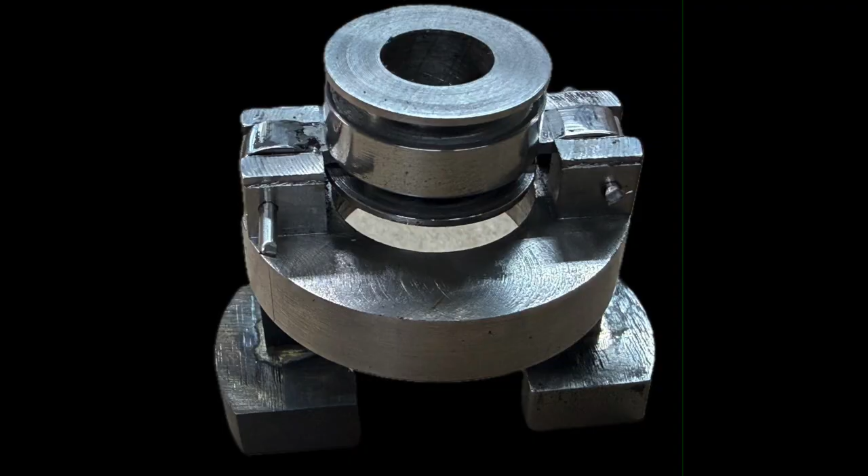Video number 23 on the odds and ends hit and miss engine. Last week we showed you how to make a few parts. One of them was these, and these are the arms that the weights for the governor go on. This one is finished now. This is for the other engine, and I'll show you how I made those weights first and attached them.

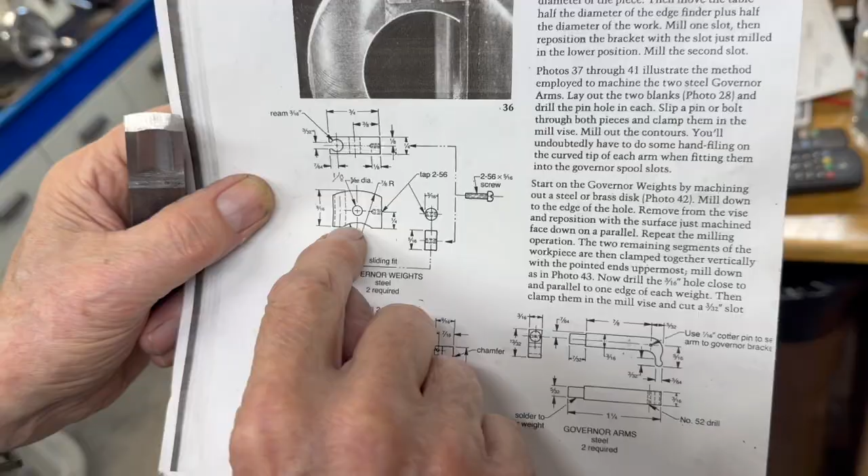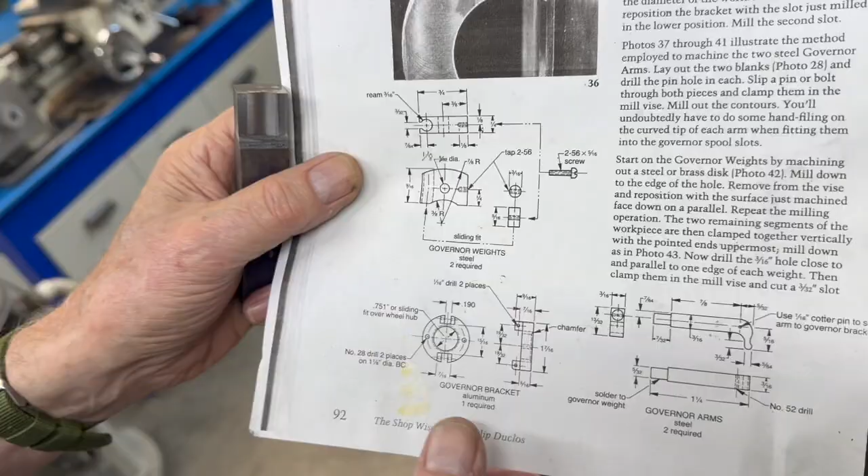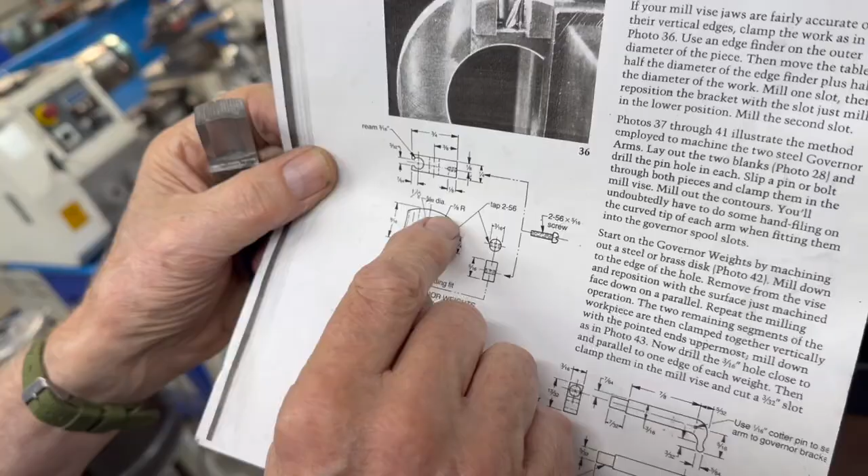So it's showing you this part here with two radiuses. This radius has to match the flywheel. The outer radius doesn't have to match anything. It's just there for looks, and it should be somewhere near the curvature of the flywheel. It's saying 7/8 of an inch, but this is only actually a little over 3/4 of an inch radius, because that's as far out as I can get my four-jaw to do that, and I'll show you how I did it. But this radius is not that important. It could actually be straight across, it wouldn't matter. But this radius has to fit against the flywheel, so you want to try to keep that in pretty close.

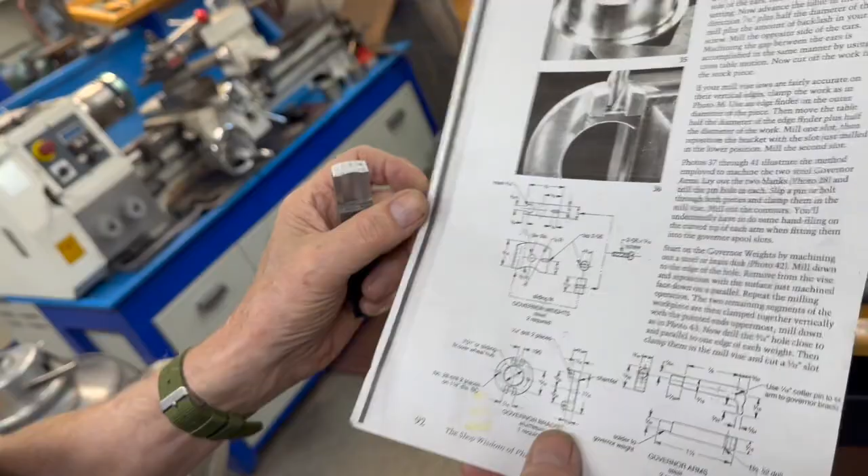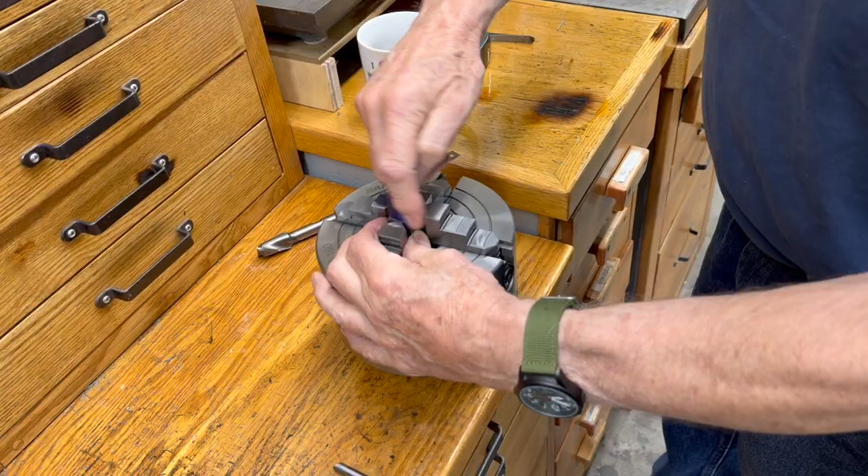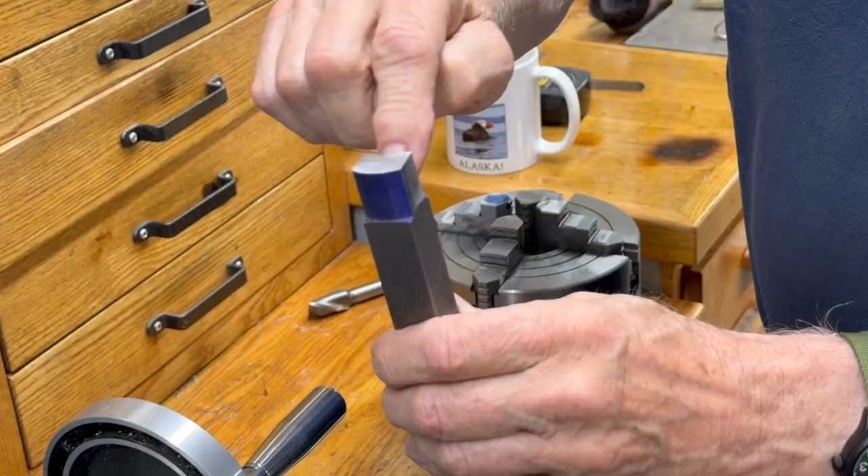So I'll show you how I made this part. It's a piece of 3/4 inch square, 12L14. What I did is I put it in the four-jaw and moved it out as far as I possibly could. Now this is a 6-inch four-jaw, so if you have a bigger one, maybe you can move it out just a little bit further, I don't know. But then I just did that radius. The inside radius I did by standing this up in the milling machine and just coming down on it with a 3/4 inch end mill. Or you could use a fly cutter. So I ended up with this.

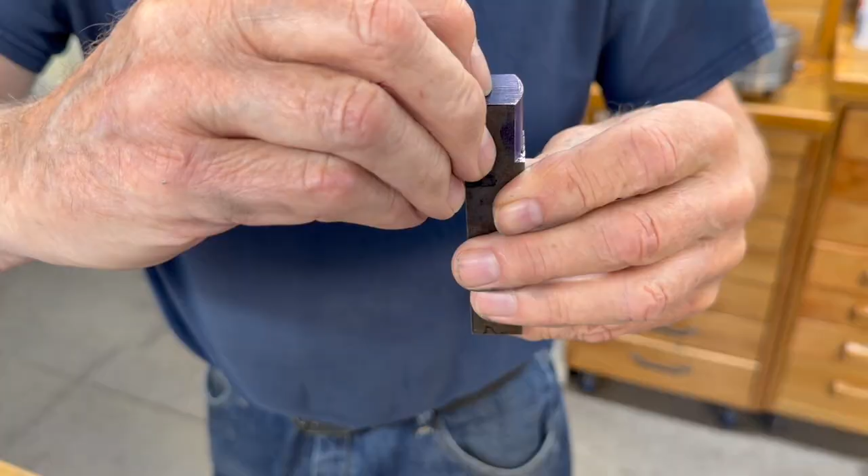Actually, first I'm going to drill the hole, so I'll have the hole in both pieces. It's showing you the hole 1/4 inch up, and I'm going to drill an 1/8 inch hole in here, because these are actually an 1/8 inch in diameter. I went a little larger than what it said in the print, but I want it plenty strong. It said 3/32. I just want a 32nd larger. So I'm going to mark this 1/4 inch up and in the center, and then I'll drill with a 1/8 hole down through it. That's good. That's good.

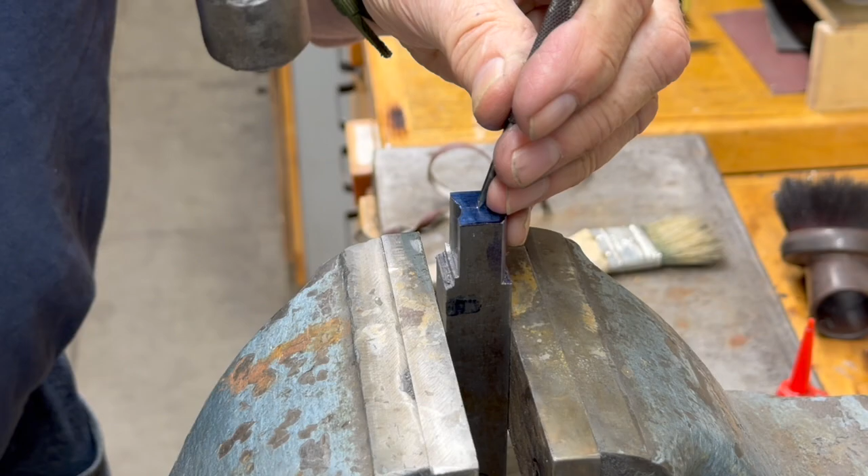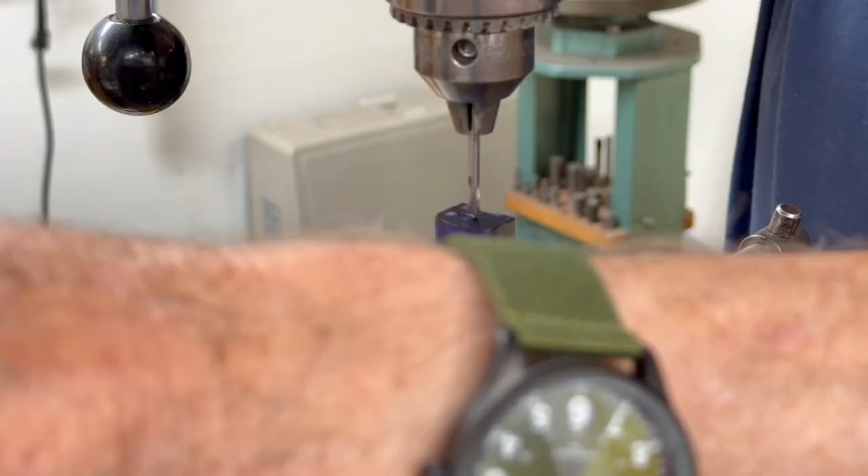I want to make sure this is standing straight up, so I got to get my square. Okay, that's square. I'll go for a center drill. Having a little light here would probably help. I got to go in a good 1/2 inch here. We got two 1/4 inch pieces plus the thickness of the saw blade. Okay, that should do it.

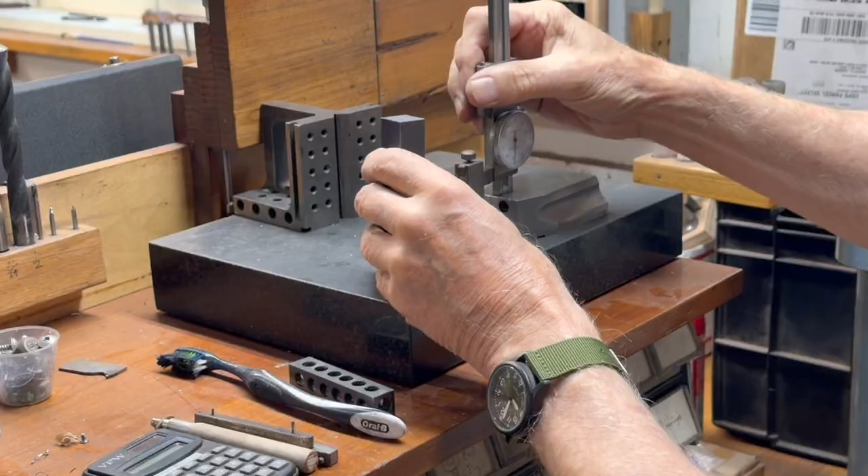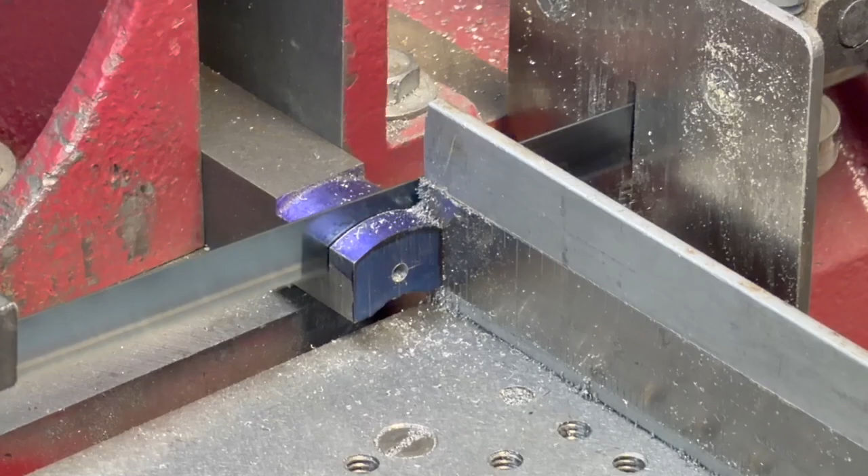I'm going to mark this 1/4 inch. I'll just put this in the cutoff saw and saw one off. That's the first one. Now I got to mark the second. Now that I cut one off, I'm going to reface this so it's nice and smooth on one side. Makes it easier to polish if it's pretty smooth. And it's got to be straight too.

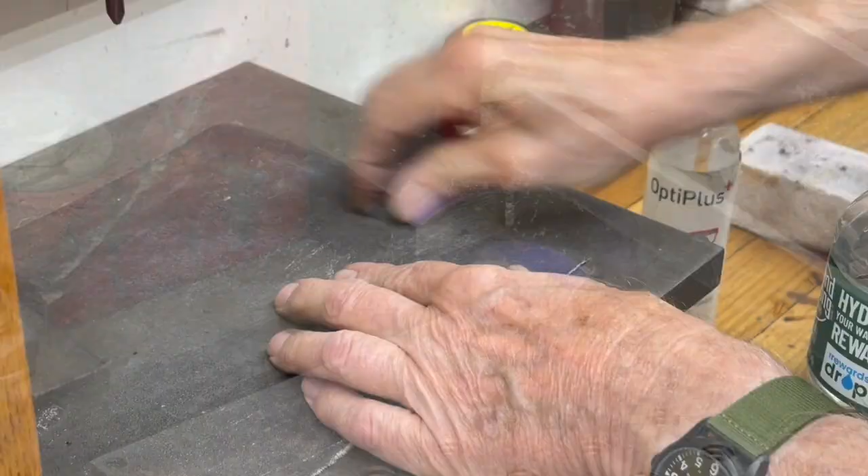The reason I'm going to do that is because I'm going to buff this out, and I want a nice smooth finish to start with. Makes it a lot faster to buff. You have to get all the saw marks out of it so that it buffs out easy. If you leave saw marks in it, or sander marks, it'll be hard to buff.

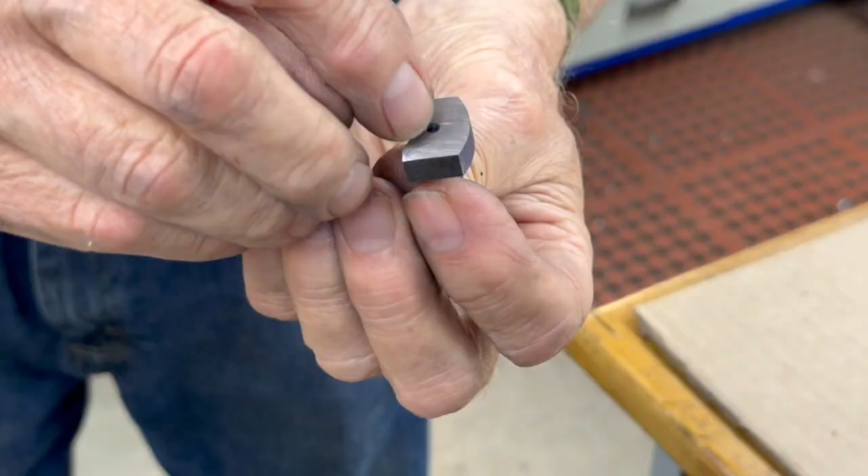So that's the way it's going to go on there. I've got a little pocket here where I can put a piece of silver braze down in that pocket, and then when I heat it up, it'll just melt and draw right in. You want to make sure you put the side that you're going to buff out, not the rough side, to the top. We'll put a little flux on that. I got to square it this way, but I'm going to do that by eye, just like that. Just before the silver solder sets, I'll just make sure that it's straight.

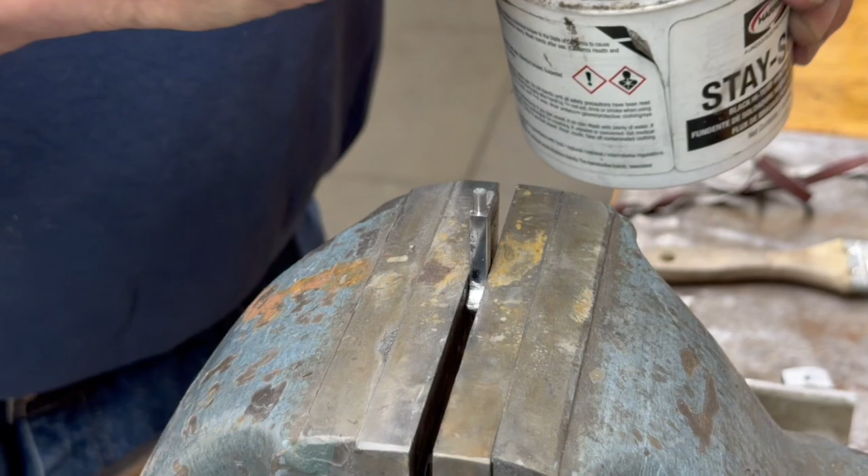I better sand that first because it's been sitting around for a while. Just put a little sandpaper on it and clean it up. So I used silver braze on these. Okay. Now we got to get a little fleck of silver. A pair of tweezers. Let's just try it. So I'm going to heat this from the bottom and draw the solder in.

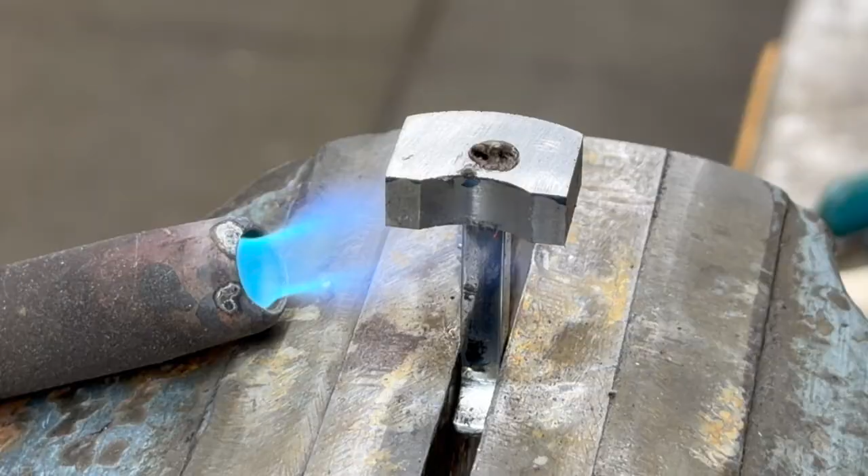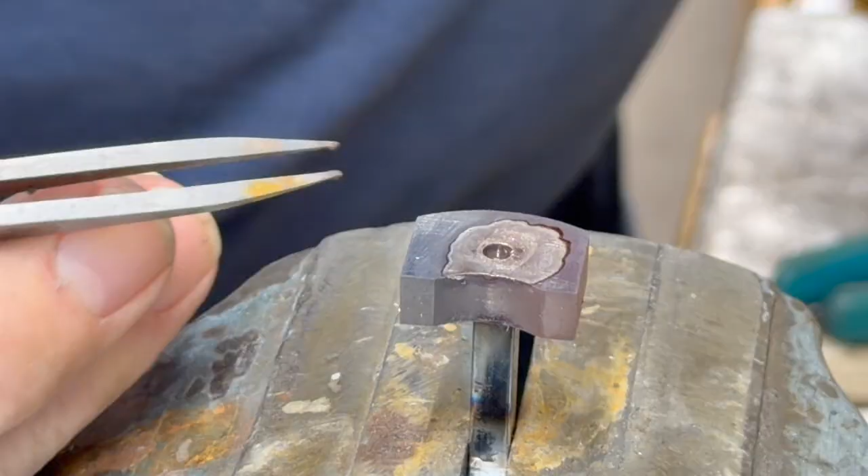When the flux turns clear, it's just about right. There it goes. You see it suck right down in there? I'm just going to check and see that that's straight. It seems to be straight. So, let it cool off and see how it did.

You can actually see where the silver went, and the flux went out to here and cleaned it, and the silver was there and it sucked all the way through, and you can see it came out on the other side, all the way around. So that's a good joint. Just sanding the silver off of it so it's easier to buff.

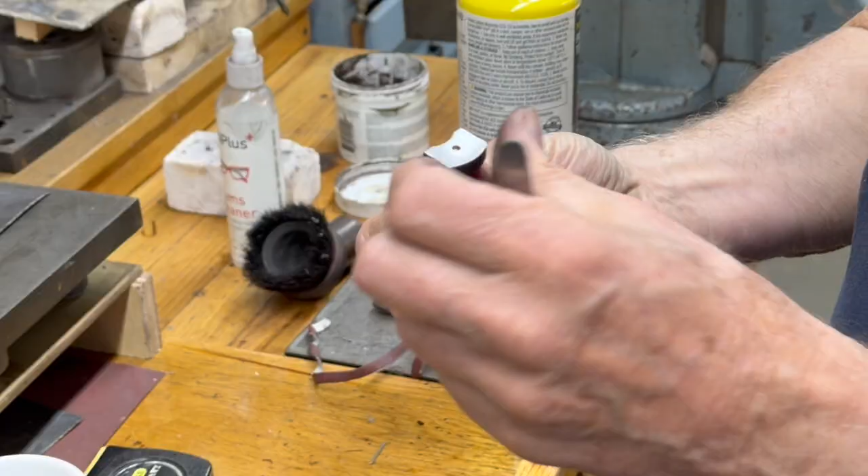We'll do the second one. Now, this end is silver brazed on there. That's why I put it in this vise. It causes a heat sink, and that way it can't melt the other silver joint. If I did that out in the open and didn't have a heat sink on that, it would fall apart. So I just put it in the vise and that holds it.

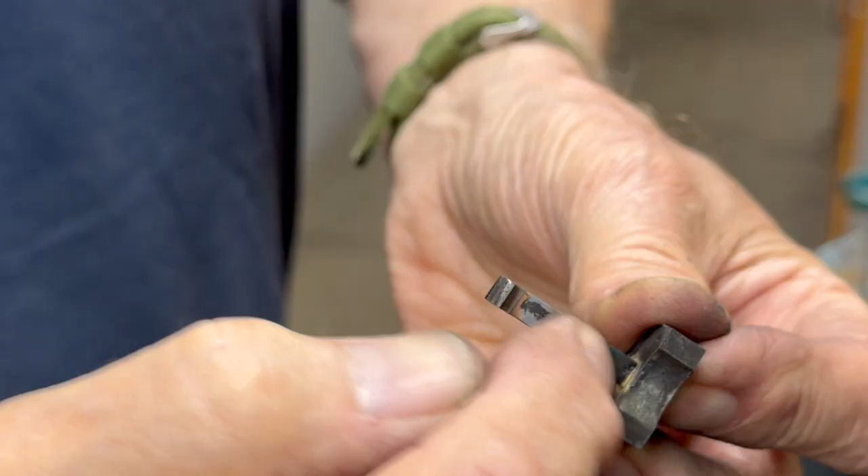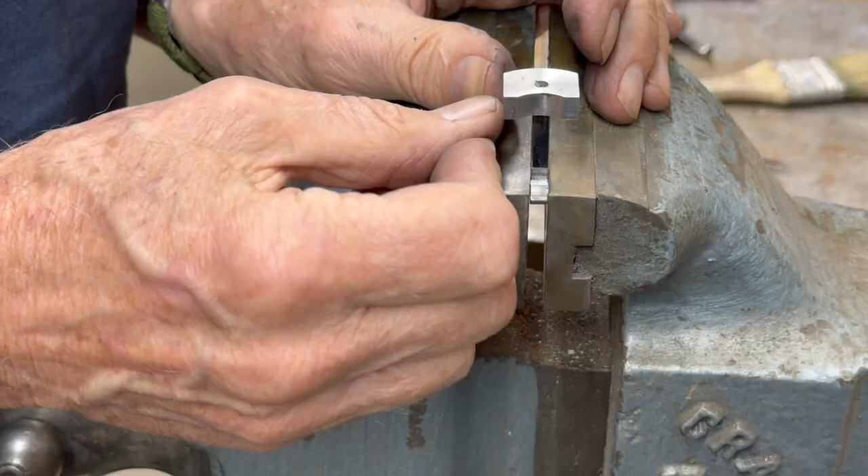Another thing is you want to make sure that this is on the side of that. You don't want to put it on backwards. It won't work backwards. Okay, the second one's set ready to solder. I think I can't get it much straighter than that.

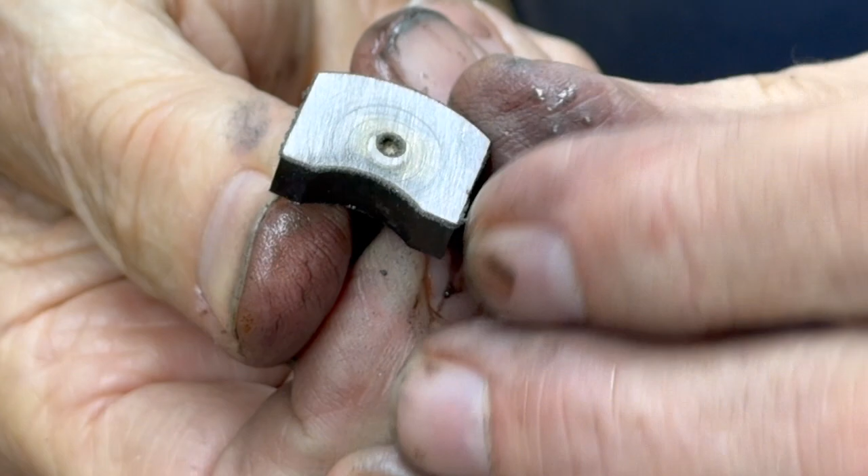Did that come through? Yeah, I guess it did. A little tiny bit of silver solder on there. If I leave that on there, what'll happen is it'll polish up, and then later on it'll really show because it doesn't turn color like the steel does. So I have to sand that all off. That's why you don't want to get a lot on there. Okay. So all those are done.

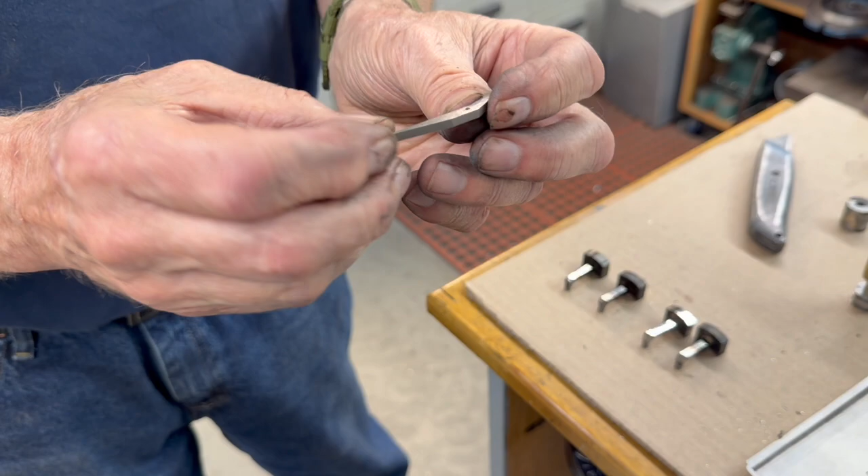So the next part we have to make is this. This is a little more complicated. It's not hard to do, but it's an awful lot of angles on it. And most of them don't mean anything as long as this end and that end in relation to that hole is right. All this stuff is just cut away the extra.

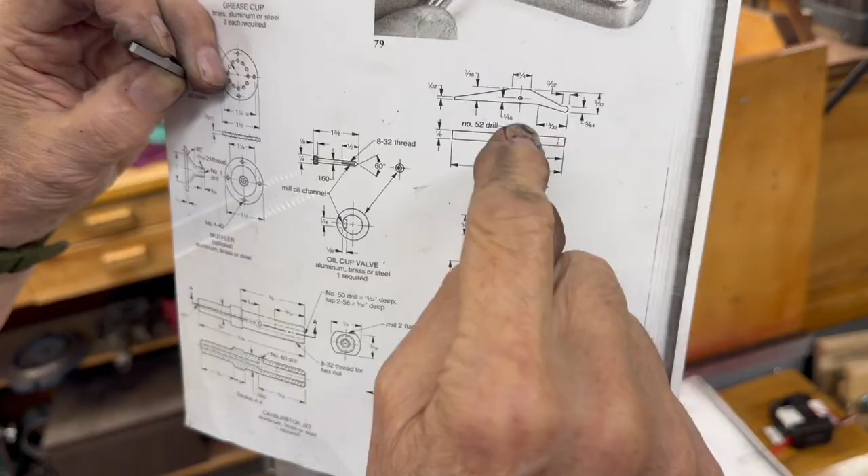So here it is on the print. And it doesn't give you any angles, it just gives you dimensions. And you have to figure the angles out from that. But what I'm going to do is make some of these cuts and then locate the hole and drill it all while it's on one piece before I cut it out completely.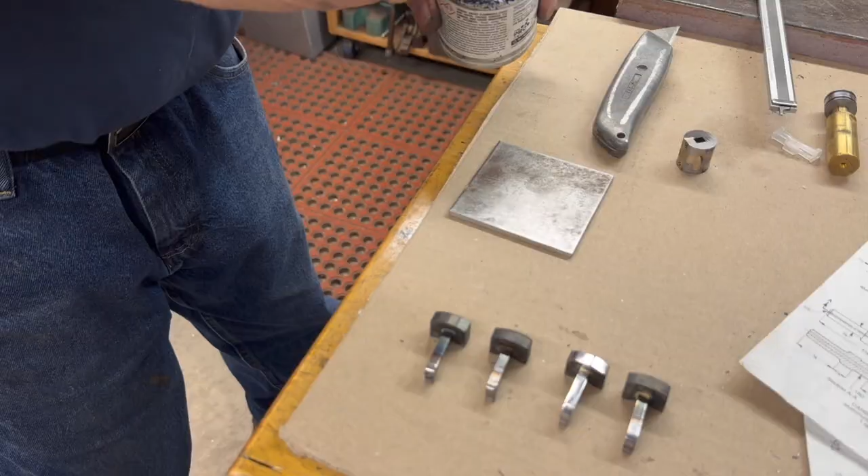So I got to get a piece of 1/8 inch steel to make that out of. So I'm just going to take a piece of, I think that's just cold roll steel. And I'm going to put a little bluing on it. So I'm going to take this over to the height gauge and make a few marks on it so then I can draw the angle lines.

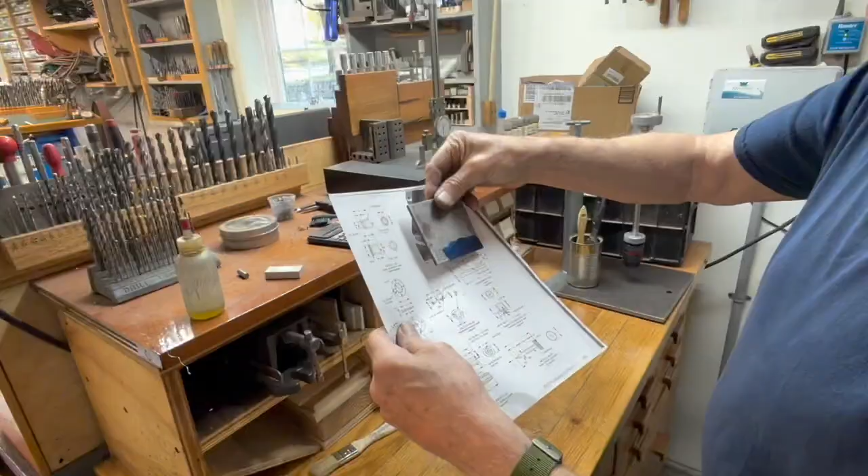So the first line I'm going to locate is this. It's 5/64 up from here. I'm going to take it out of here that way. So I'm going to go up 5/64 and draw a straight line. That line doesn't go all the way to the end, so I'm going to put it like that.

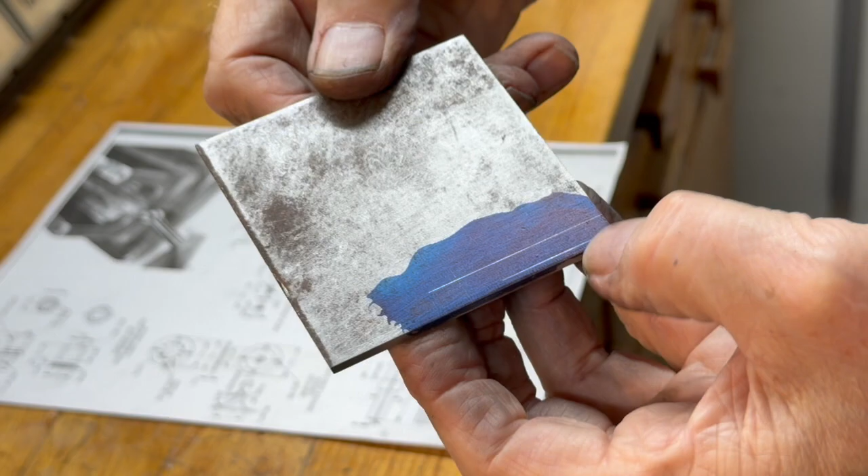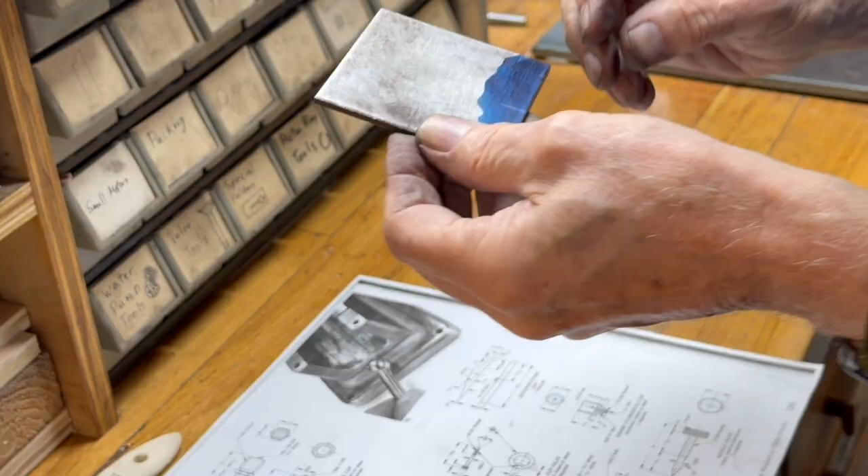5/64 is right there. So now we just got 3 lines on there, but this is the end of it up here. So now I've got to measure in 13/32. 13/32. Okay. So it's pretty hard to see, but that's a very, very short angle there. And then it goes all the way up to there. And it just is here.

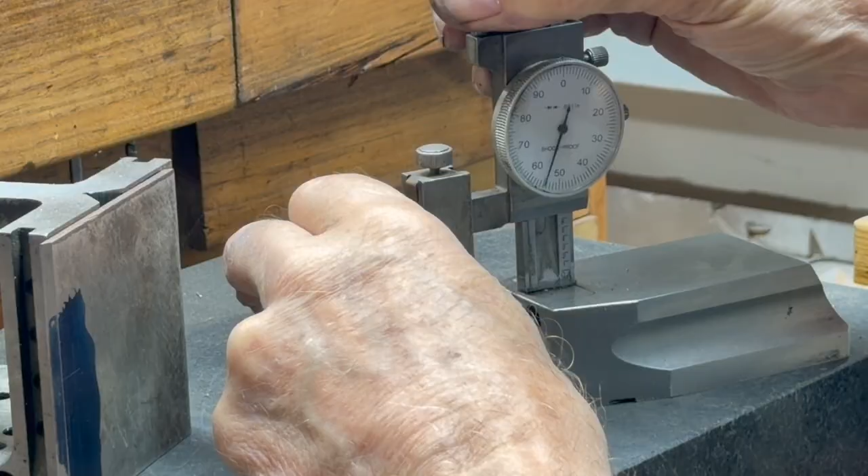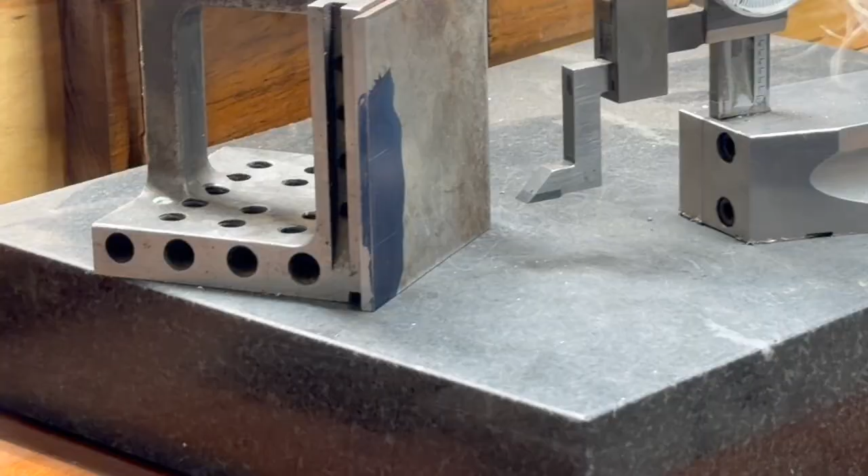So now we've got to get this. Where's the measure? Oh, 21/32 is the hole. That's .656. That's the hole. And the hole from the bottom, it's 9/64 down from this bottom. So this is the dimension of the hole. It's .140 from the bottom.

So what I'm going to do is, while this is still a square piece, I'm going to prick punch that and drill the hole, because it's a lot easier to do it than when you get it all cut out. So that calls for a number 52 drill hole. So I'm just going to spot it and drill it through. So you can see this is a lot easier to hold on to than when you got that little tiny piece.

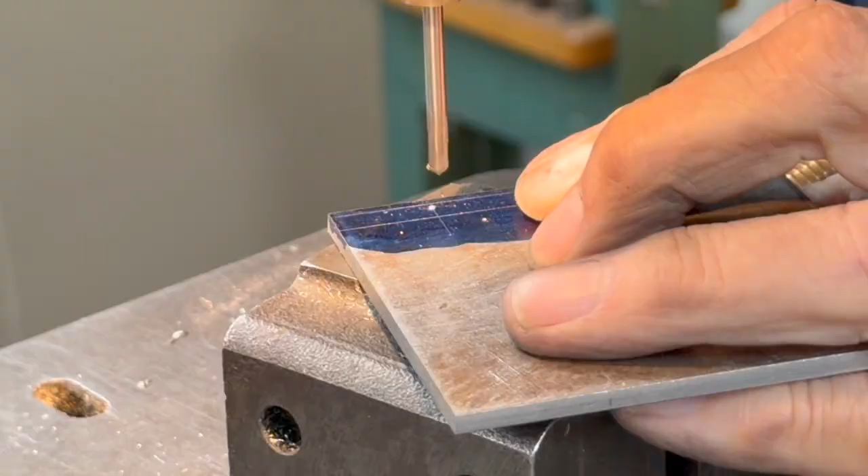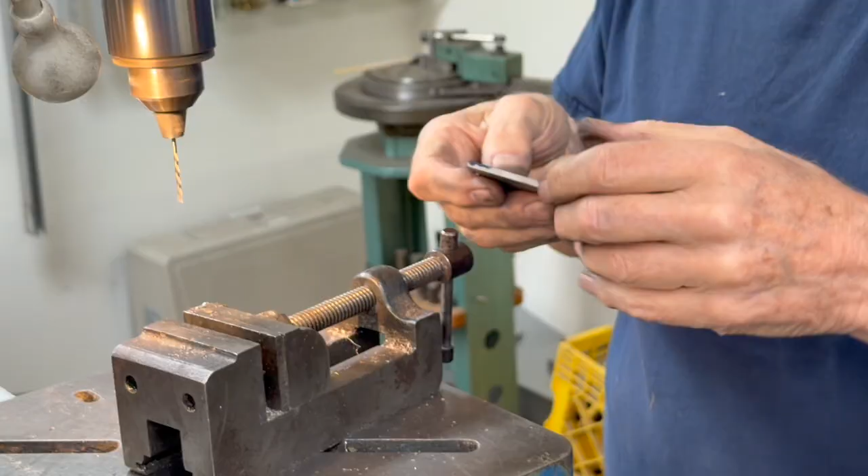Okay, there it is with a hole in it. Now what I'm going to do is take a ruler and just put those angles on there. These back angles aren't really that important, but you just want it to look nice. You want to have this end about the right width. And then this end here comes down about this far away.

And you're going to have, that's got to be, I'm going to kind of draw that on there. This is the little bulb that fits into the notch. So I'm just going to sort of fake that in there so I can see where my line goes. Now I can cut it out.

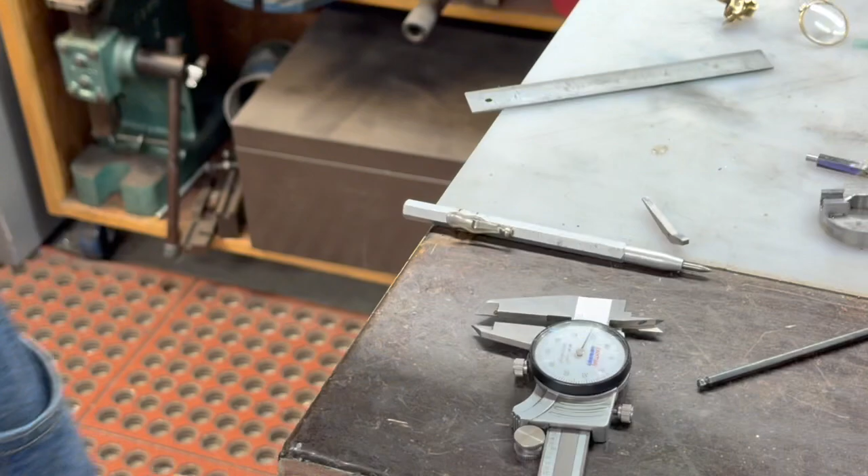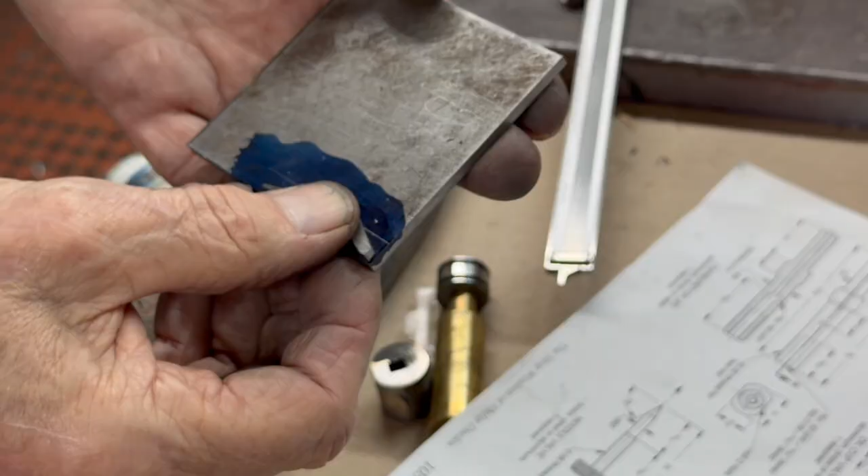See, this is the shape. As you can see, just about right. That end gets rounded. That's basically what you're going to do, is put this same profile onto that.

As you can see, I have left the lines on there and sawed away most of it. And the only two cuts I have to make now is this one and this one. So I'm going to make this one first while it's still on the solid piece, and then I'll cut it off. And what I'll do is put this over the 1-inch sander and sand up to those lines, or I can mill it also down to the lines.

There it is. I'm going to do some sanding on it now and get it pretty much to the shape. You got to put a small end mill in here, but just to finish going up to the line on those edges. Now I'm just eyeballing the line.

A good trick is to lay a thin piece of steel on here and bring it down to the line. And if you tilt it up, you can see that's pretty close right there. You just tilt it. Okay.

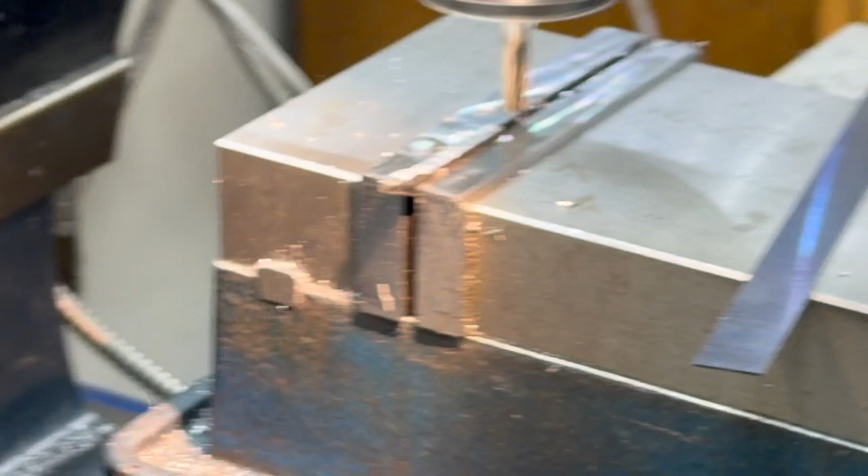Now I'm going to do this line here, just a little slight angle there. Like I said before, it's not real critical, as long as it looks nice and the two ends are in the right place compared to the hole.

This takes a little time, but when you go to clean it up, it looks pretty good. I could sand up to all those lines, but it wouldn't be straight across. I do it at the very finish, but a lot of times filing it works too. If you want to just put a slight finish on it, the fine file works great.

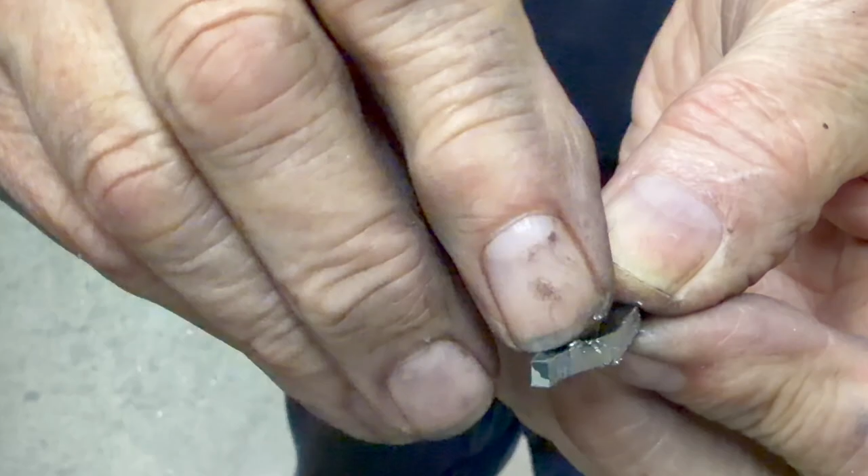So I've got some of the things straightened out. Now I'm going to go back to the sander and show you what I do to put that on there. All I'm going to do is use a file, a chainsaw file, and hit both sides of that, and then just round the top on the sander. So if you want to make that little round end, I use a chainsaw file. And they cut real nice.

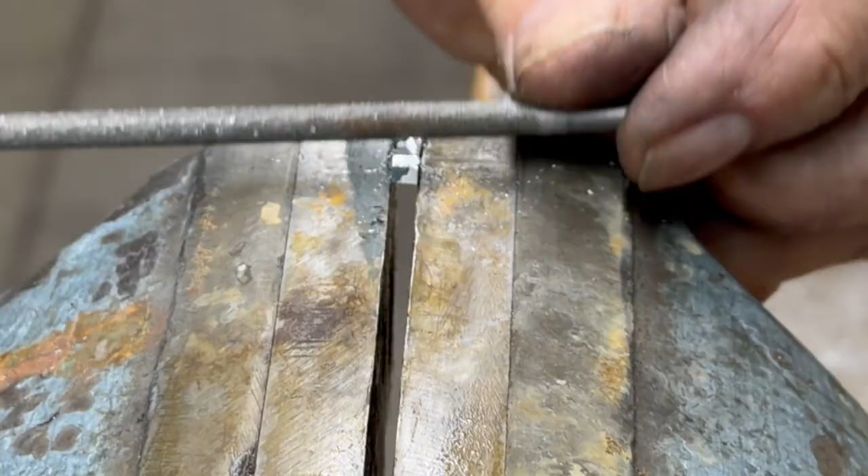I don't know if you can see that or not yet. Probably pretty hard to see. Let me get the second one on, and then I'll put it on the sandpaper there and let you look at it. This one's a little tougher to control. Once you get it started, you're all set.

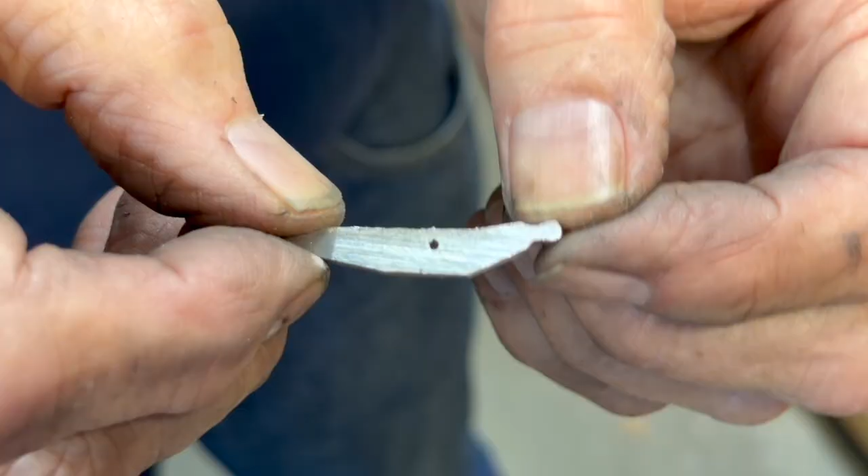So you should be able to see the profile there now, I think. But like I said, this isn't actually the way I do it. I just put a piece of drill rod in there, and that seems to work much easier than making this. And it's probably a little stronger, I'm not sure, but I've never had one break. So there it is, milled out and all finished.

And I left a square end on here, and I've been cheating on this. Instead of making that little ball end on it, which becomes quite weak, I just drill a hole in there and put a piece of drill rod in it and silver braze it, and the drill rod will work as the point to go up into that slot. You see, I can just put a piece of drill rod on that just fits in the slot, and it seems to work very nicely, instead of doing that to the end of it.

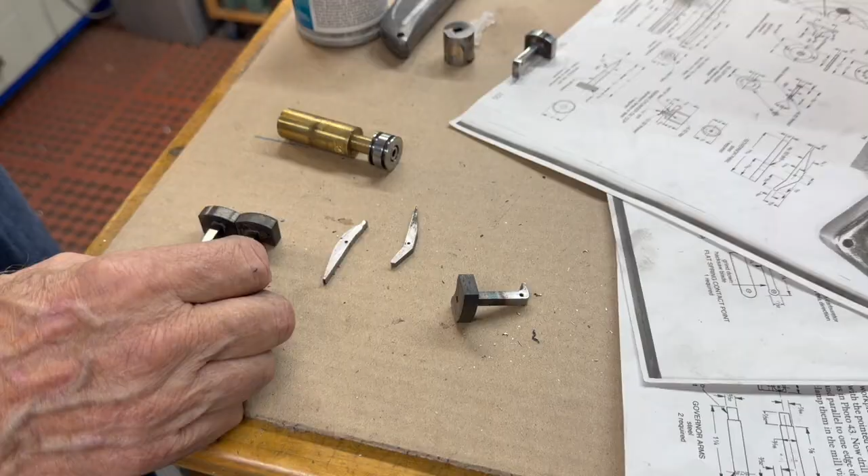So before I finish these parts up, I'm going to make them and put them on the engine so that I can see how they fit together. So what you have to have is, you see this spool moves back and forth. And if you look down in there, can you see that finger down in there moving? Yes. It moves that finger, and the finger will engage with the cam and hold it from coming up.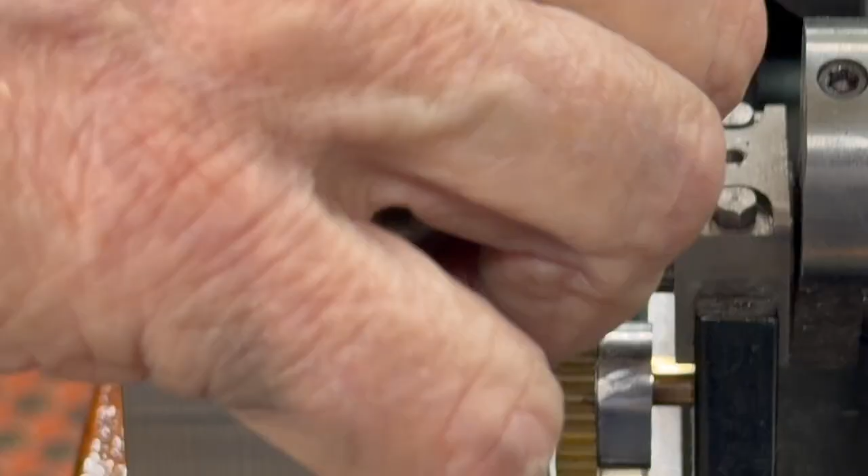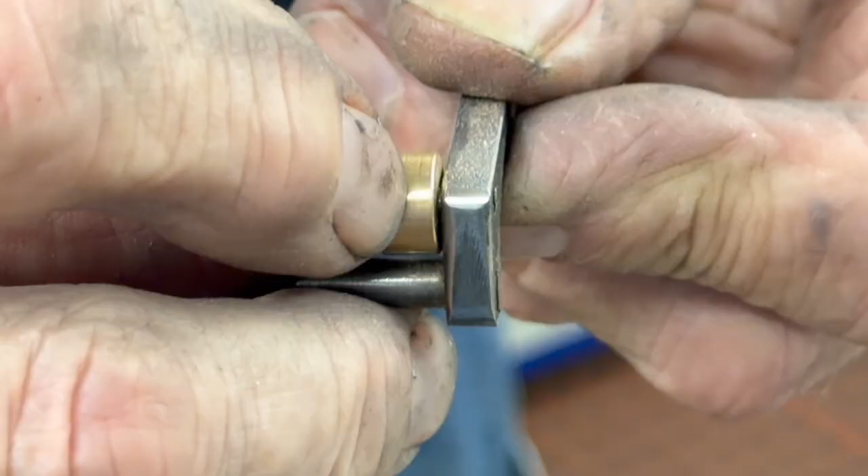When it's this way, see that? It keeps the cam from coming up, which is holding the exhaust valve open. So we're going to go the other way, and it should clear. Whoop, it's not clearing the gear. Yeah, I got to do a little bit of work with that roller before I can show you that. So what happened is this roller screw is sticking out too far. So I've got to make that roller just a tiny bit narrower and get the screw embedded in there further so that it doesn't hit the bar.

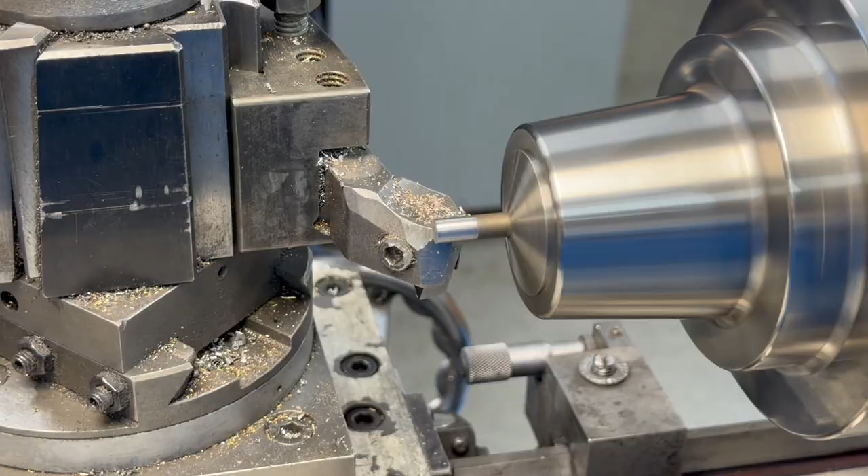So what I did was I made that roller just a little wider than it showed in the print. That was a big mistake. It should have gone by the print size. I thought wider was better, but it isn't. It's in the way. Now I gotta take it down a little bit. And now I'm gonna counterbore that screw just a little bit more, and then have to make another screw. That's plenty.

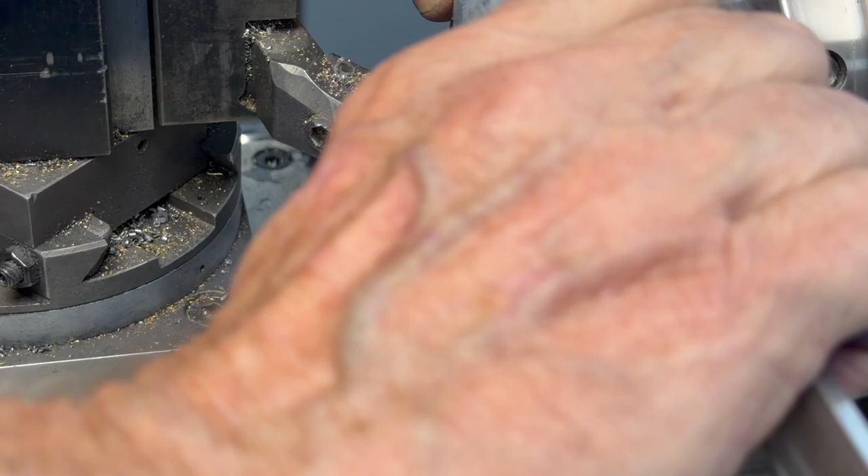So we're going to take off 14. So I'm going to take off 5, which is 10. And that shouldn't fit on there yet. Not quite. Oh, boy, it's close. I think I can sand that the rest of the way. Very close. Perfect fit. Perfect fit.

Now I got to get the thread on there. That doesn't have to be the full distance. So what I'm doing is putting this on here. I'm going to go back, touch it, go 5/1000. Actually, I'm going to go 8/1000 and lock my stop, so that I'm going to cut this down to the thread diameter. So I don't have to go down much, less than 50/1000. So that's less than 25.

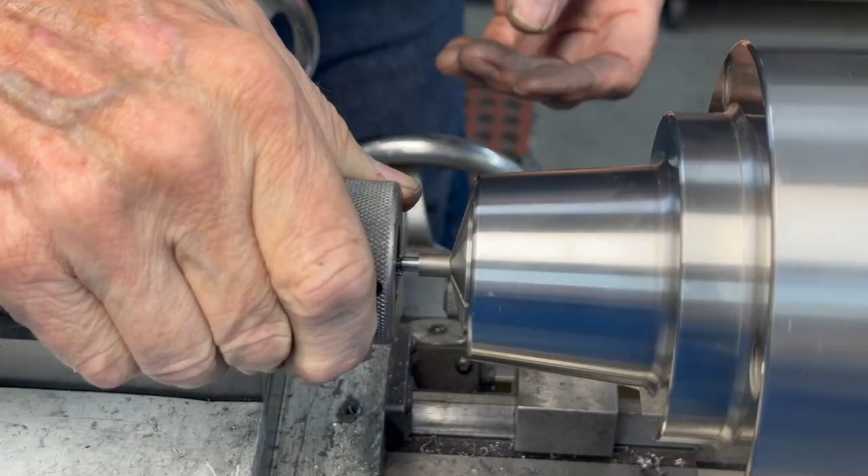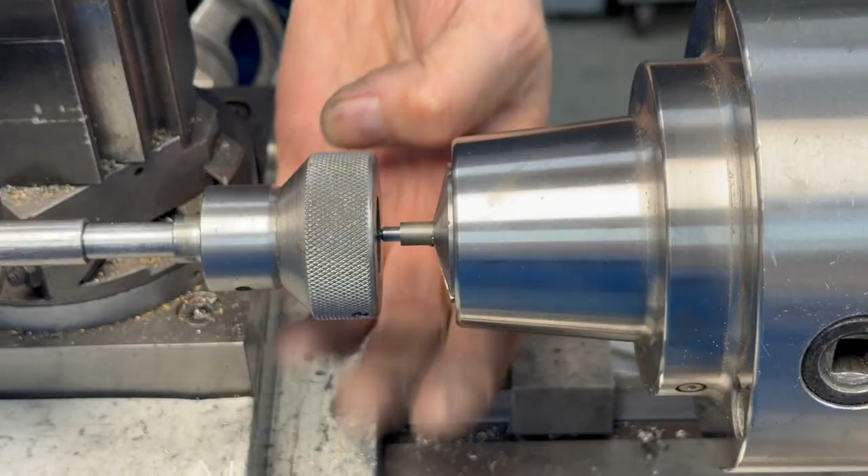Now I'm just going to reverse that die to get it threaded on just a little bit further. Backwards now. Yeah, it's just going to give me maybe a half a thread more, I think. Now I'm going to part that off.

All we need is the slot. There's two ways of doing a slot. Well, there's probably more than two. You could do it with a hacksaw. You can do it in the bandsaw, that's pretty rough looking. Or you can take a slitting saw in the milling machine. Or I'll show you something else here. I gotta get another collet first. But we can actually do it in the lathe.

Tight. Now, the cutter is ground quite thin this way. You got a very, very sharp edge on it, and when I put it on here, I'm going to center it on that little nub, I hope. Yep, it's pretty well centered. Lock it down. Now if I go across that, you see I can cut a slot in that screw.

It's a little too low. I'm going to move it up. Let's try that. Down just a little. There it is. Let's see what that does. I'm just going to go in probably 4 or 5 thousandths at a time, and I can cut a slot right in that screw. I'm going to cut this pretty deep, almost down to the very end of the head, which takes a minute.

But to me, this is easier than going over to the milling machine with some little tiny piece like this and trying to center it and put the cutter in there and everything. It takes probably a little longer to cut it, but it does a beautiful job. I'm taking off, let's see, 5 here, which is 2.5 thousandths out of whack. So like I say, it takes a minute to get through there. That looks pretty good. Check it with a screwdriver. It's in there perfect.

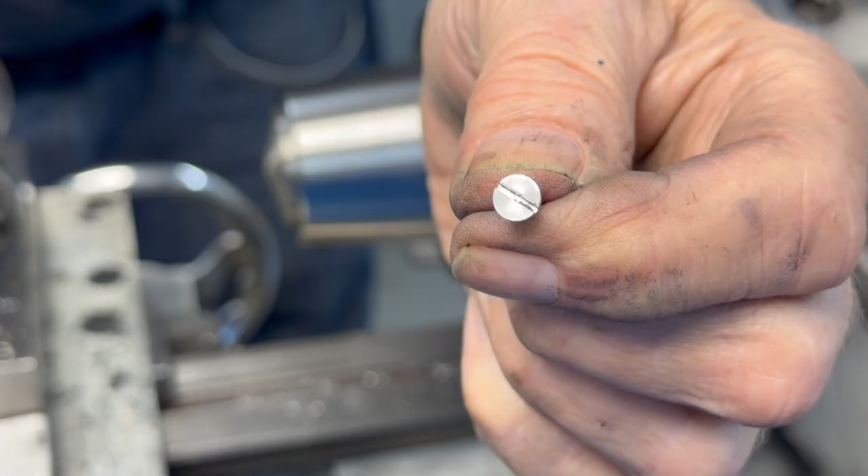Boy. Yep. Makes a nice slot. A little tiny burr on there from threading it, and it doesn't want to go in. Awful hard to hold on to. Let's see if that'll go in there now. There it is. It's in there now. Now what I got to do is screw it onto the arm. Where did I put that, Jim? Lucky I have Jim around here to find things for me.

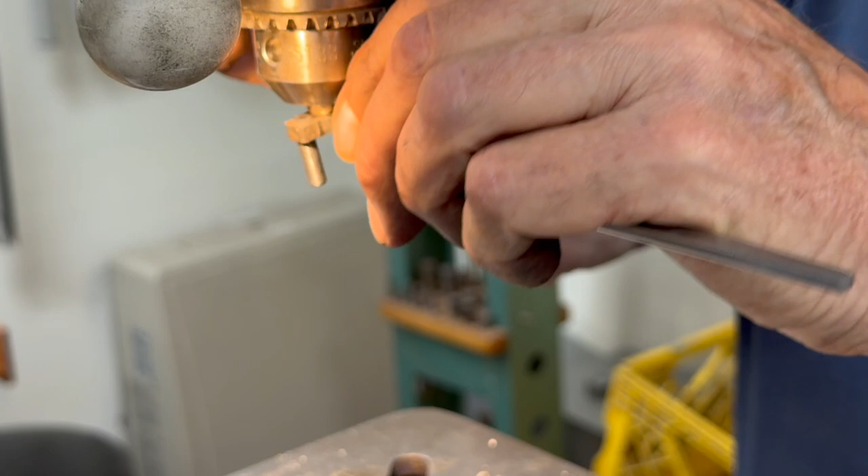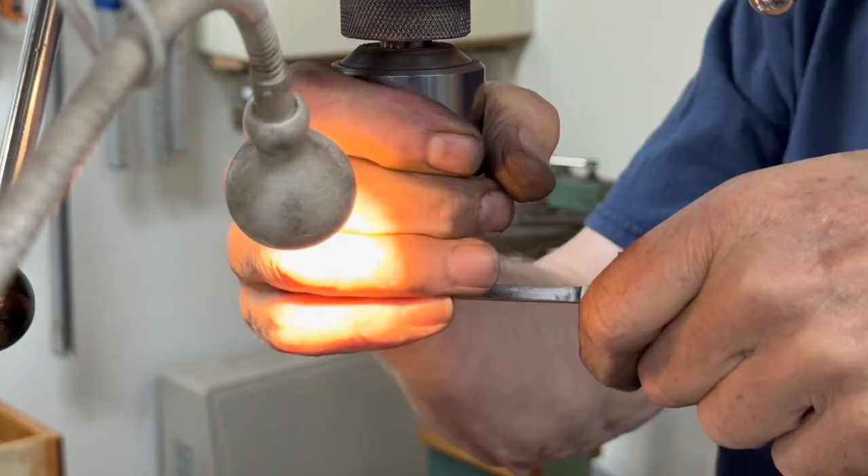So hopefully, if I tighten this up with a screwdriver, it's going to set right in there. It's a little tight, so I'm just going to put this in the chuck and run it for a minute and see if I can loosen it up. It's a tiny burr on it. Start slow. Didn't even feel it. So let's see what happens now. See, now it turns freely.

This mechanism, you have to set up a few things. One is the length of this. When the cam is all the way down and you push that in, this has to be just a hair shorter than here. So I've got to cut quite a bit off of this one because that has to go in there and grab the cam and hold the valve open. This part is too long, and they did that on purpose in the print so that you'd be able to adjust it.

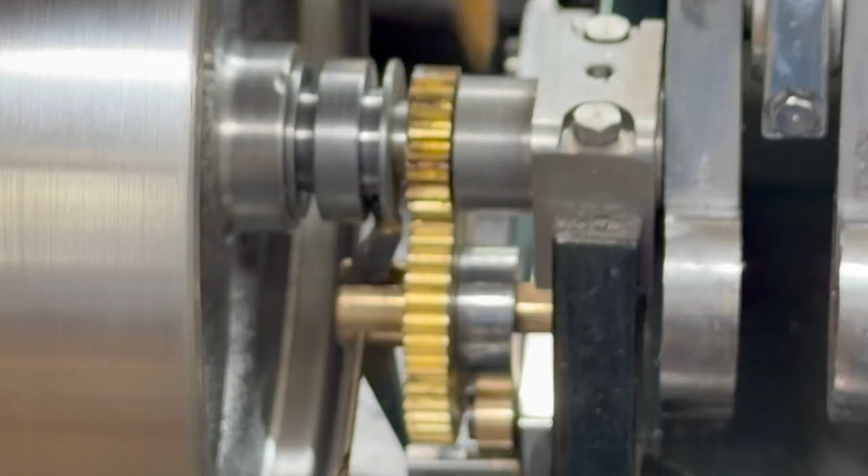So it goes down, and this pops in, and that should be just exactly on the high lobe of the cam. So if you put the high lobe of the cam down, thusly, and you push this in, and you cut it off so it will clear right there, then it should be right. And this has to go back and forth, and the flywheel has to be out a little further. I've got the flywheel in a little too far, but that will engage with that bar sticking out there. This is in the slot up here.

Once you get that done, you can see this is very close to that gear, but it can't actually rub on it because it never goes below. If it went below and this slid in, see, that wouldn't go up. But if you adjust things right, that will never go below there, so it stays against the gear just slightly. So the first thing I have to do is cut this off and get it to work right. When I get everything adjusted, I'll show in the next video how it all turned out.

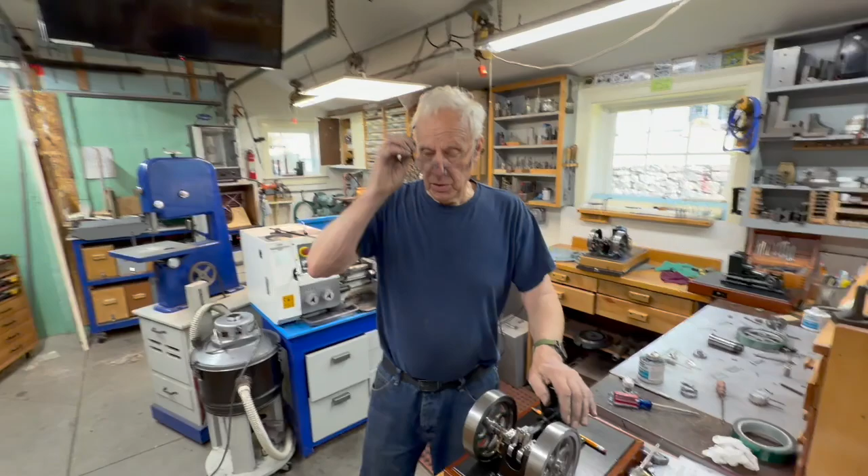So thank you very much for watching. I hope that this was clear. I know it's kind of a complicated mechanism to show you on a video, but once you put it together, I think you'll realize exactly how it works. And just remember that has to engage in that dog so that the exhaust valve stays open.